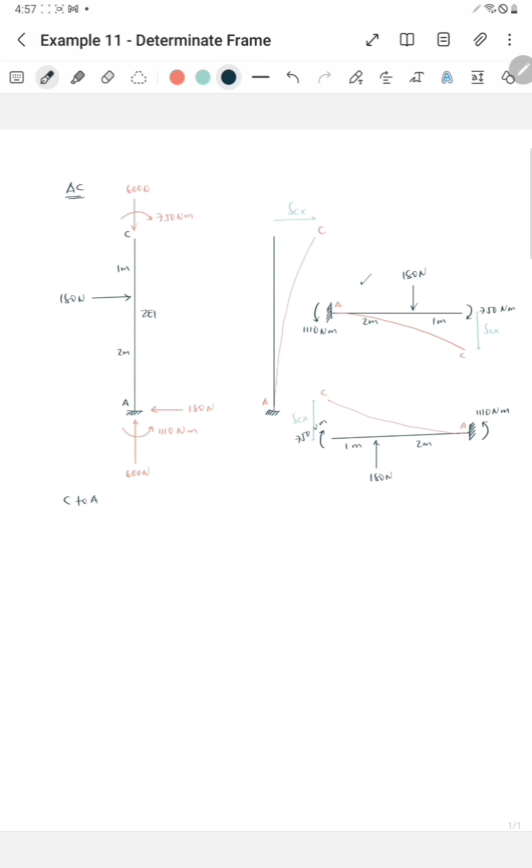Number 2, tinatanong is the rotation at C. So consider the direction C to A. Consider the first option. So the direction C to A is to the left. And the load from C to A is a downward concentrated load. So that the formula for 6A-bar over L is Pa over L times L square minus A square. Substitute the data. P is 180, A is 2 meters, L is the length C to A, 3, then times L square minus A square. So the value is 600.

Then applicable is formula for theta left. Then substitute the data. So theta is theta C equals moment near is the moment at C. The direction is downward, so negative 750. The length is the distance from C to A, so 3 over 3 times the flexural rigidity is 2EI plus moment far is the moment at A. The direction is downward, negative 1110. The length is 3 over 6 times the flexural rigidity is 2EI, then plus 6A-bar over L is 600, then over 6 times the flexural rigidity is 2EI, then minus H over L.

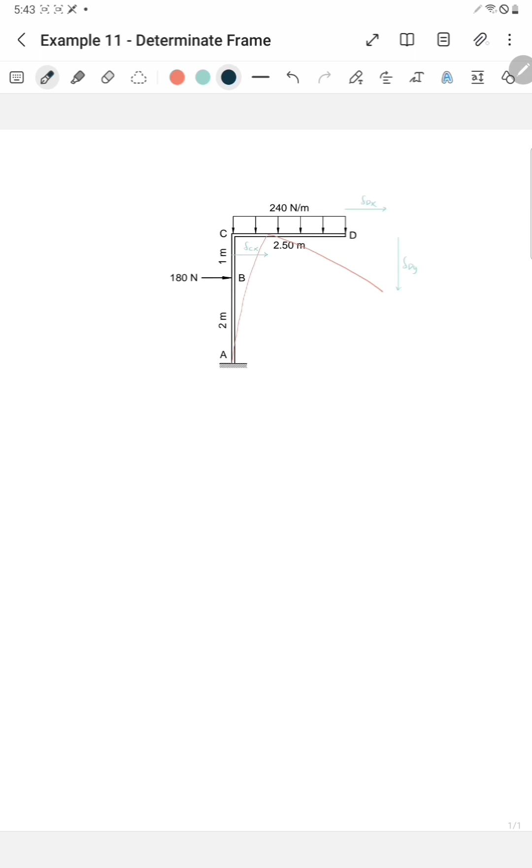So for number 3, ang tinatanong is the horizontal displacement of point D. So that is delta DX. Sa beams and frames, merong assumption sa subject natin. At ang assumption, axial deformation is 0, unless otherwise stated na hindi 0 ang axial deformation. So sa problem natin, hindi naman sinabi kung consider or neglect the axial deformation. So automatic yon. Kapag walang sinabi, axial deformation is neglected or it is equal to 0.

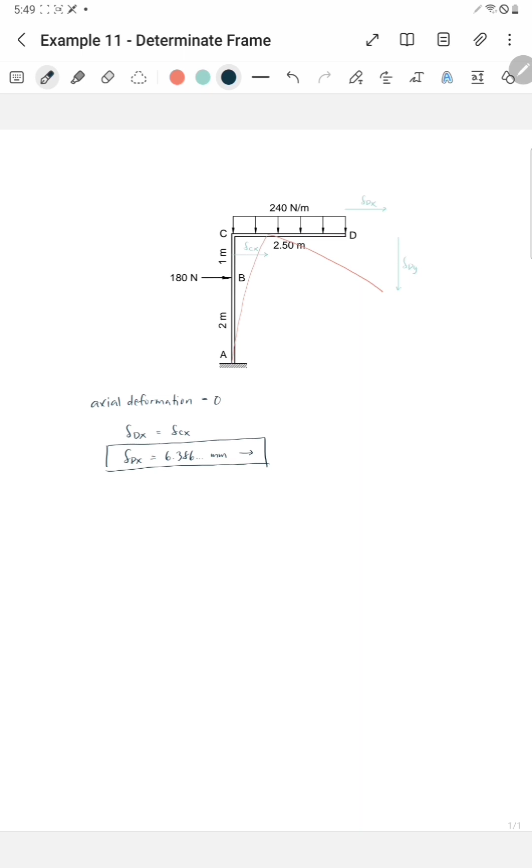At dahil 0 yung axial deformation, ibig sabihin yung length ng column AC is constant and yung length ng beam CD is also constant. At dahil constant yung length ng beam CD, kung ano man yung horizontal movement ni point C, ay siya rin dapat yung horizontal movement ng point D. So delta DX is equal to delta CX. So delta DX is equal to 6.386 millimeters to the right. So yan na yung sagot sa number 3. The answer is letter B.

Next, consider the beam CD. So, ito na yung deformed shape. Consider the direction C to D. So, the direction is right. The load from C to D is a uniform load, so the formula for 6A-bar over L is WL cubed over 4. W is 240, the length is 2.5, then cubed over 4. So the parameter 6A-bar over L is equal to 937.5.

Then applicable is the formula for theta right. Substitute the data. So theta C is equal to: the moment near is the moment at C, and the moment at C is downward, so negative 750. The length is the distance from C to D, so 2.5 over 3EI, the flexural rigidity for beam CD. Then plus the moment far, the moment at D, 0, times L over 6EI. Then plus 6A-bar over L, 937.5 over 6EI, then minus h over L.

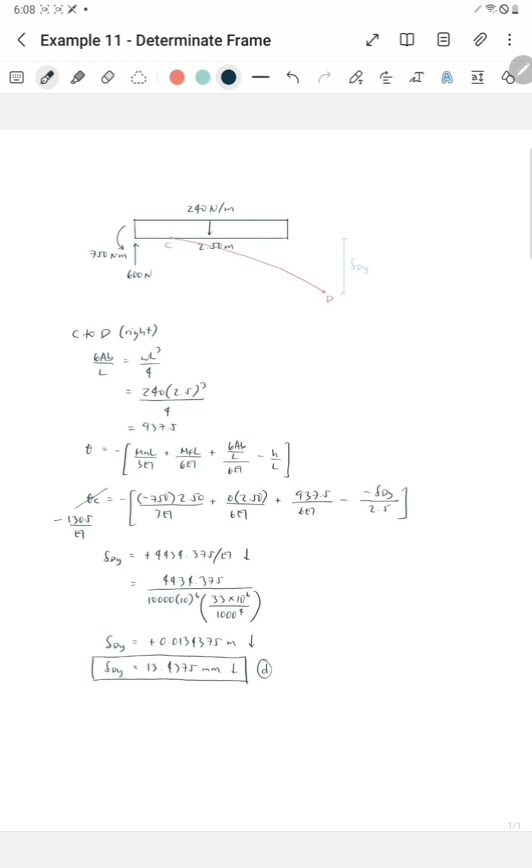Next, consider the direction D to C. So left. The load from D to C is uniform load, and the formula for 6A-bar over L is WL cubed over 4. Substitute the data. W is 240, L is 2.5, then cubed over 4. So the parameter 6A-bar over L is equal to 937.5.

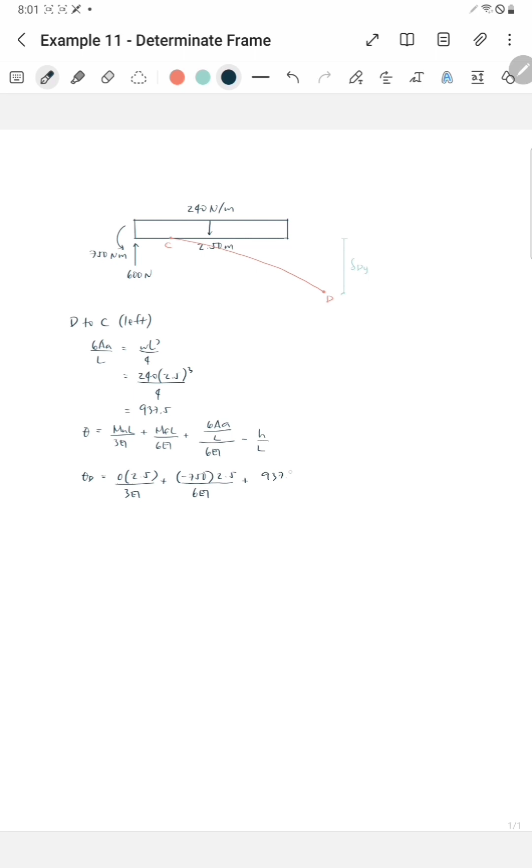Applicable is the formula for theta left. Then substitute the data. Theta D is equal to: moment near is the moment at D, 0, L is the distance from D to C, 2.5 over 3EI, plus moment far is the moment at C. Ang direction is downward, so the moment at C is negative 750. L is 2.5 over 6EI, plus 6A-bar over L is 937.5 over 6EI, minus h over L.

For h, gawa tayo ng horizontal line from D to C, then measure the vertical distance towards C. Since the direction of the vertical distance towards C is upward, so positive, and the vertical distance is equal to delta DY, equal to 4,434.375 over EI. So theta D is equal to negative 1,930 over EI. Negative means that the rotation theta D is clockwise.

Then theta D is equal to negative 1,930 over the modulus of elasticity, 10,000 megapascals times 1 million, times the moment of inertia, 33 times 10 raised to 6 divided by 1,000 raised to 4. So theta D is equal to negative 0.005848 radians. Then multiply this result by 180 over pi, so the theta in degrees is equal to negative 0.33509 degrees. So ito na yung sagot sa number 5, letter D.